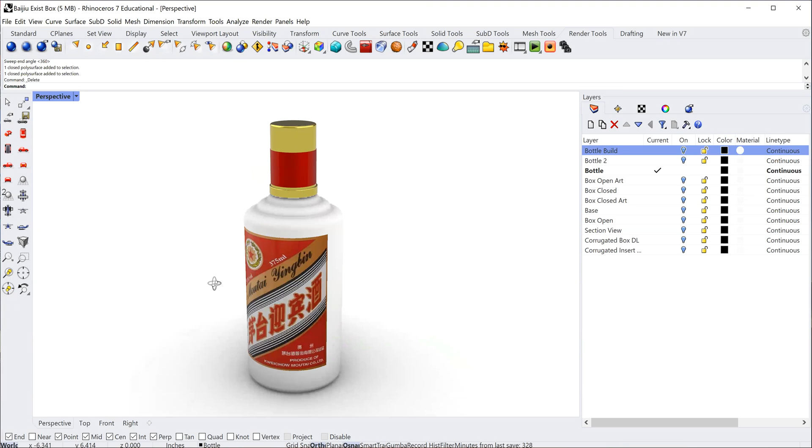Building the Moutai Baijiu bottle because I'm making a secondary cardboard structure to go around that, so this is more of a placeholder. I separated this little tutorial out to show how I built this and to map the label on it. This will be relatively simple. It's just two revolves, one for the closure and one for the body, and I'll close them off. Then I'm going to map the label on. So let's go back to the beginning.

I found this image online, and it's the best, flattest picture I could find. I still have a little bit of a perspective going on with that, so it's not perfect, but it'll be okay.

I'm going to trace this with line work, and I'm actually going to trim out this label and use that to map onto the bottle. So with this here, let's go into...

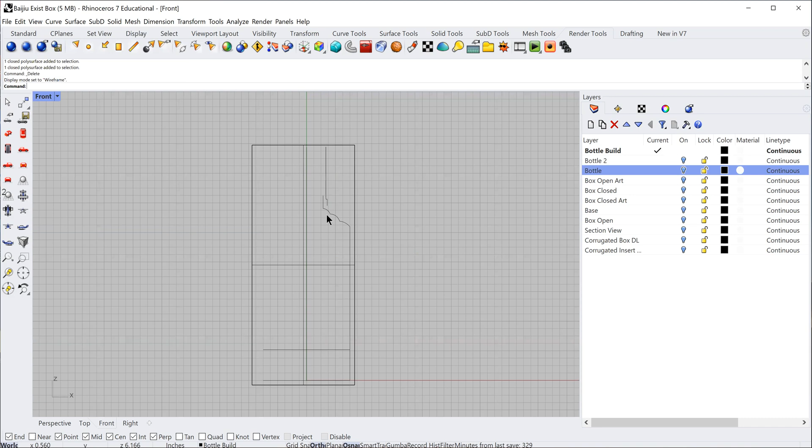View wireframe. So here's my line work. All I did was trace this over that photograph of the bottle up at the top. I did these separately and stitched them together, and I did that right over the rendered view because you can't see that unless you have it in a rendered view. So let me move in here so you can see very subtly this line work here. So there it is. I built that and connected them together and then used that for a revolve.

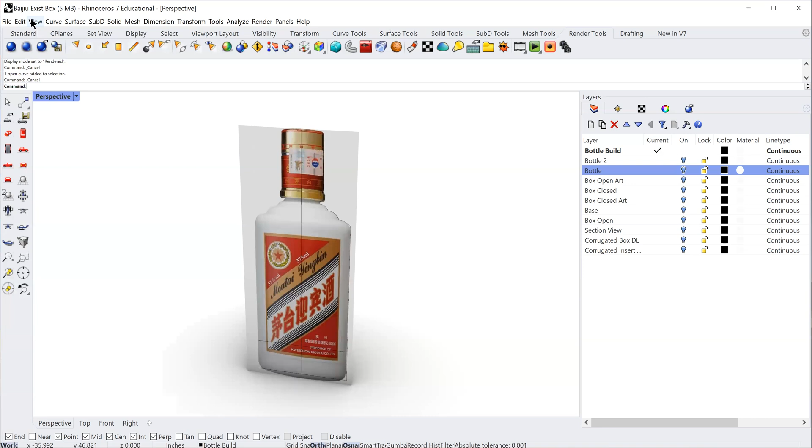So let's go into perspective, and we can go back into wireframe. For revolve, let me put in the revolve command. Revolve, and we're going to do... that's it, revolve, plain revolve.

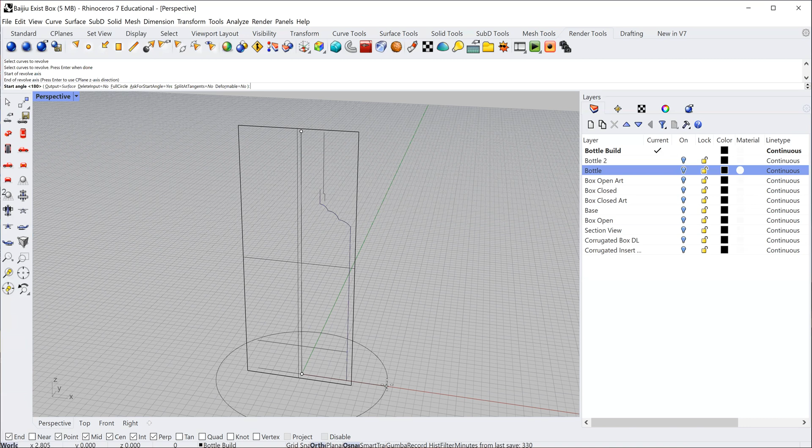If I select this whole line here and then enter, I'm going to select the center point. I'm going to start at the bottom, it's snapping at the bottom, and I'm going to go to the top and snap. So that's my center line, and I'm going to click out here. I have orthographics on, so it's going to be snapping as I turn. See if there's 90 degrees, there's another 90, and it's coming around, and then it's coming all the way around to the side. So I'm going to click and enter, and there is the revolve.

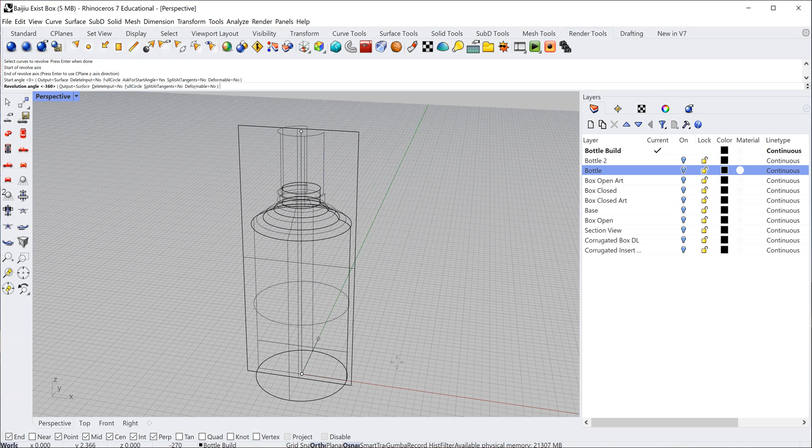Let's do the one at the top, same time. I'm going to put the revolve command back in. Revolve, select this, and I'm going to select that same center point. I got to enter, select the same center point here, here. And then I'm going to select out here, and then I'm going to do that same revolve all the way around. Click, enter. So now I have those two.

So let's go into shaded mode. Let's render. We don't need rendered. Shaded. Okay, so here are the two objects.

So we have to cap them off. There's a couple ways you can do that, but I'm just going to go right to it, it's in the surface tools. No, it might be in the solid tools. Right here, we have this tool called cap planar holes. So you can put the command in, I'm just going to select that tool right here. If I select this object and then enter, it automatically closes the top and the bottom because they're planar holes. They're not an organic type of cut, it's a flat hole. So that works very easily.

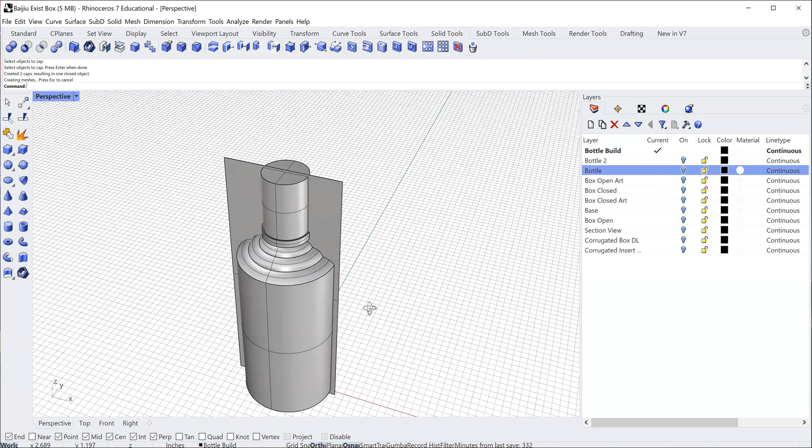I'm going to do that again for the bottom one. And let's take a look. It has closed it top and bottom. The reason I'm doing that is because I am going to radius this edge on the bottom and this radius at the top here. So we need to have that as a solid object so we can do that.

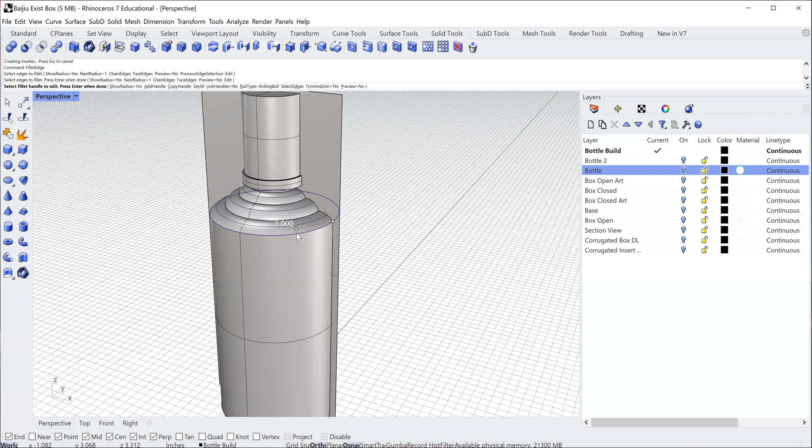So the next one is to go into fillet. This is a fillet edge. I'm going to select this edge right here, enter. And then I have these two handles, these little white dots. Let's move in a little bit. I'm going to select that first dot out here on the edge and then press enter. And then I'm going to select this other dot on the inside so I can move this, and it's going to give me my radius. I believe I did this, I don't remember how big it was, about a quarter inch. And it's now softened that edge at the top there. I'm going to do the same thing at the bottom.

So we go to fillet, fillet edge. I'm going to select this edge, enter. Select the first handle, enter, and then pull that back out.

I believe this was a little bit less or similar. I'm snapping to something here. It's about a quarter. This, enter. It's not radius, it's that bottom edge.

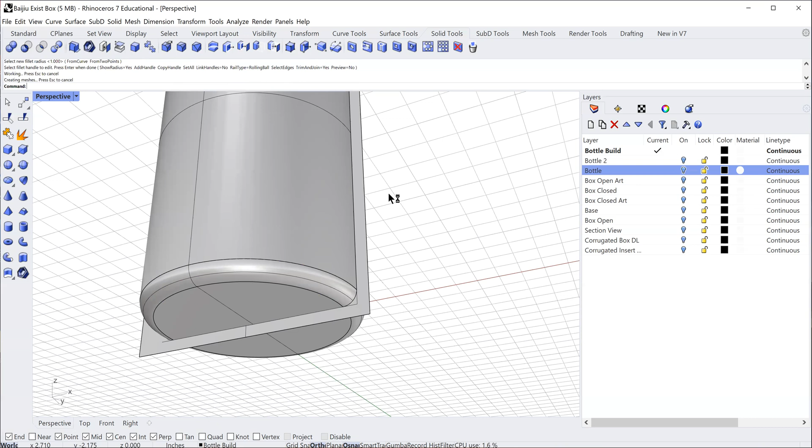And then we did a little radius here at the top. Let's see here. Fillet, edge, and select this edge here. Enter. Fillet handle. Enter. This was pretty small, might be like 60 thousandths.

Okay, so that's the bottle all ready to go. So the next part was to put the label on.

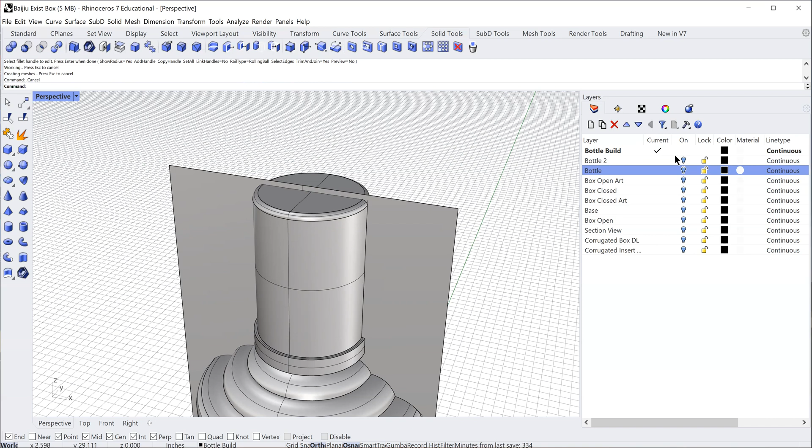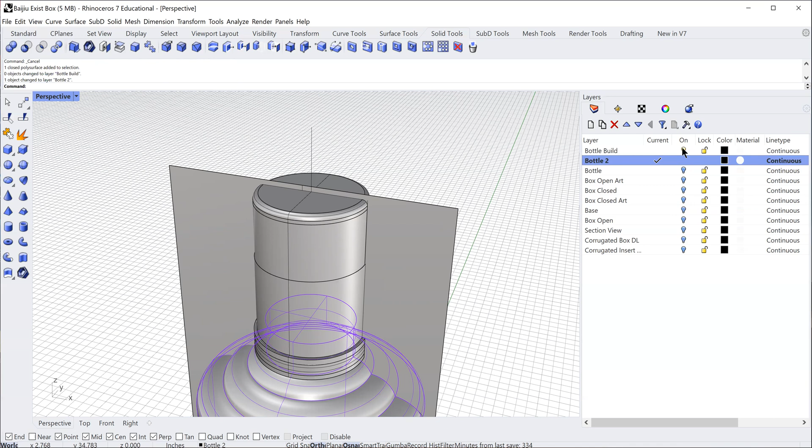Oops, I lost my bottle. Let's take that. I'm just going to change layer. Put that in this next part. Change. Okay. So now we have the whole part.

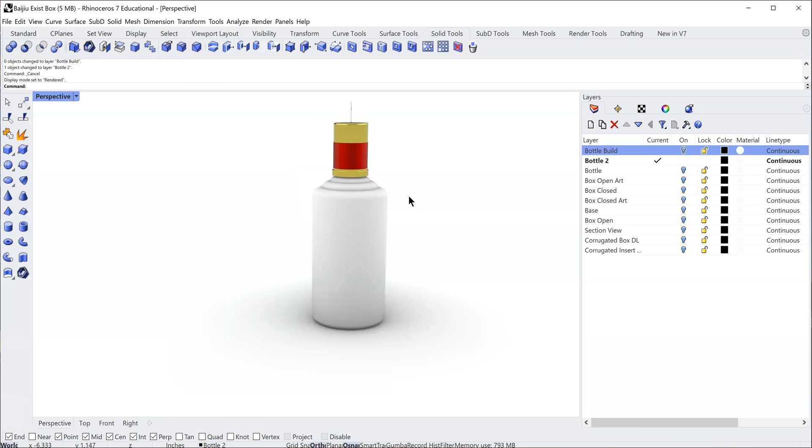Okay, let's take a look at this in rendered. So I just created this gold color at the top in my color specifier, and this red part is just a separate piece of geometry. I just made a little cylinder there and just made it the color. There are graphics on some of these components, but I'm letting that go for now.

I'm just going to put the label on. So to put a label on, we need to select the object, and then we go under our properties, and then we have this little green square here, which is our decals. And then we have the plus signs. If you click on that plus sign, you can go bring in texture map.

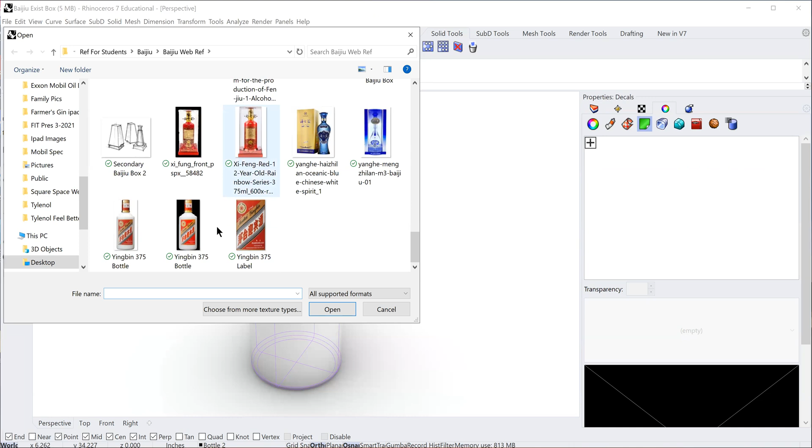So here's the little label I cut from that photograph I had of the bottle. And I'm going to do this cylindrically. Okay, this part gets a little confusing. We have controls to configure the position of the label on the bottle after we position it, but we need to get it on perpendicular.

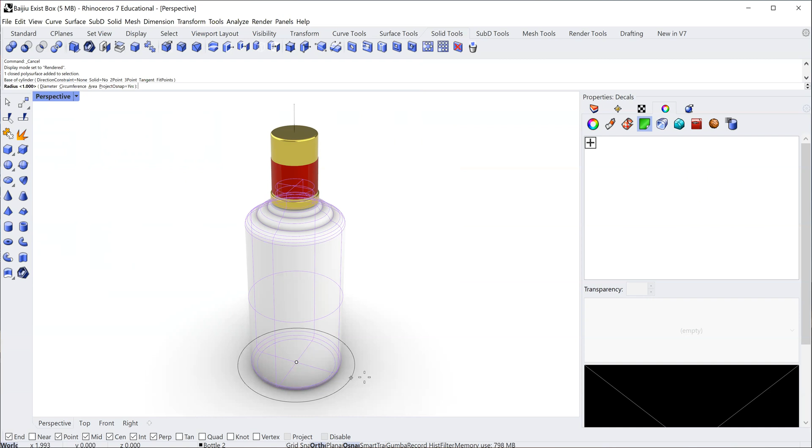So there's a few things we have to do. I'm going to try to select that bottom disc right there on center. I'm going to select that, and I'm going to come out here and select here. But now I need to get this to be perpendicular. So I'm going to try to select this center line that I have up here. And I believe that's it right there.

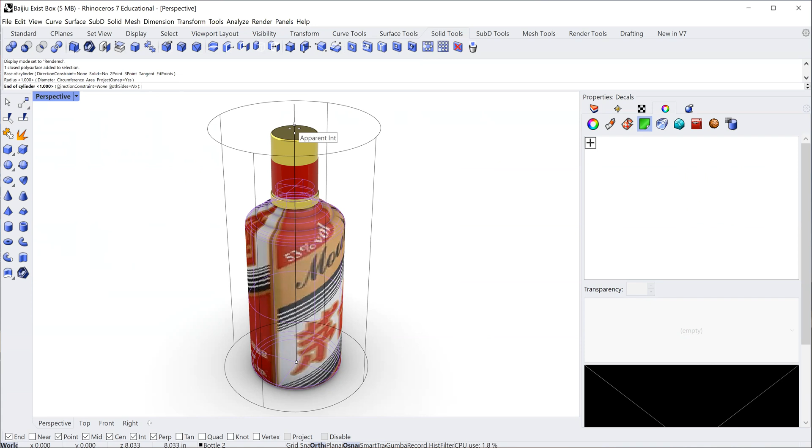This is critical, you might have to experiment a little bit. So I'm going to click on that line, and I think this is going to give me perpendicular. So let's go like this, and then it's sort of asking me how I want to map this around. So I'm just sort of guessing because I'm going to be able to control this after. Click here, and then now we have it on there. So it's a little crazy, a little wonky, all over the place, but we can control that.

So we have this dialog box over here with X, Y, and Z coordinates. We have start and end, which is how far it's wrapping around the bottle. And then we have the height of the actual label. Those are the things we're going to deal with.

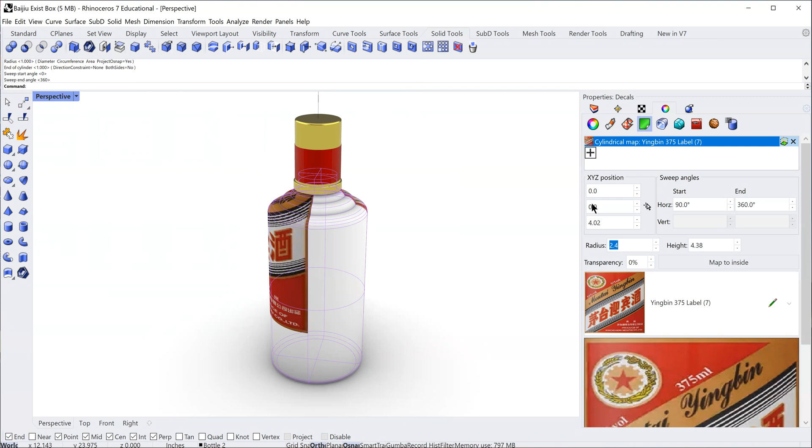So let's start to work on these. At the height, I believe I was at 4.38, if I remember correctly, so that'll be a start. Now up here in X, Y, and Z, the Z coordinate is the bottom one. I'm just going to start clicking down to move the label down onto the body of the bottle, which is about there.

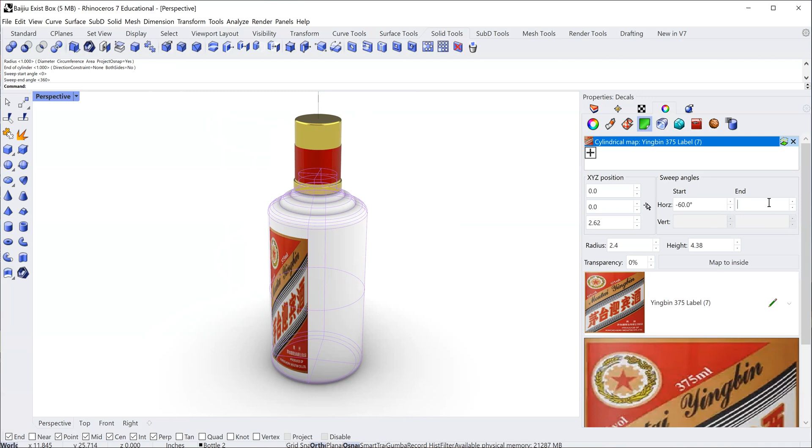So now the label is wrapped around. It's sort of on the side, and that's where these two start and end numbers come in about how we're wrapping it around. So negative would be over to the left-hand side of the bottle. So I'm going to do negative 60 degrees, and then I believe I went positive 60 to the other side. So it was like 120 degrees total wrap.

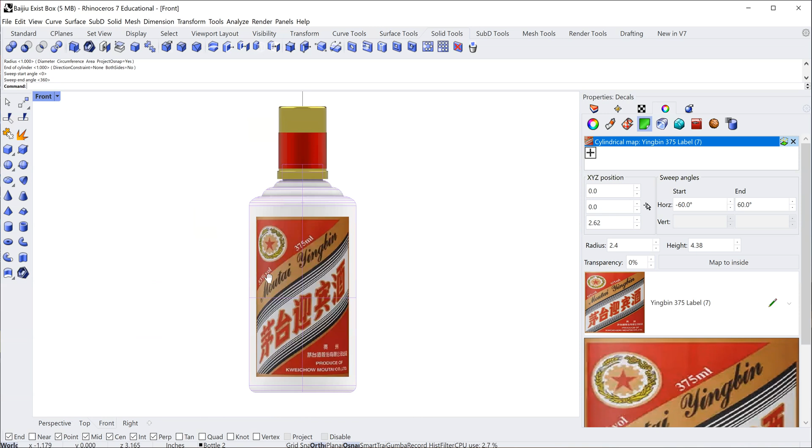So you have to play with those numbers to get that into position. So that's about where it is. And a good test is I'm just going to look at the front. That's about where it is. That looks about right, like the photograph that I had.

So I'm going to just deselect. Okay, so that's bringing in the label. So I'm going to use this in another tutorial to build a secondary structure that goes around the outside.